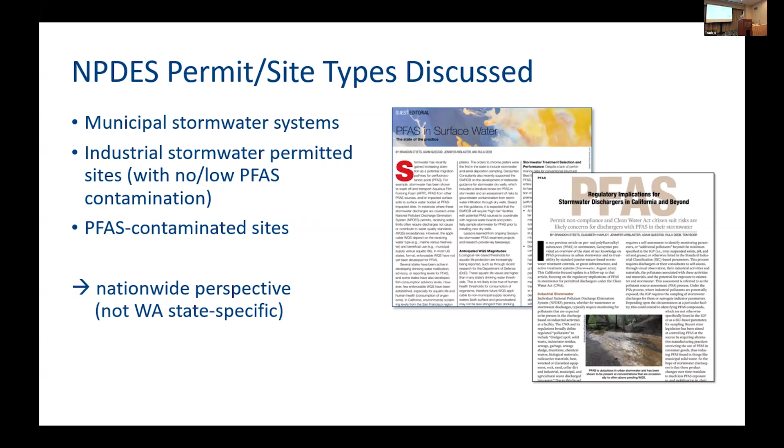Okay, so now going into the regulation of this contaminant first. I do a lot of litigation, so I apologize if I get kind of into the weeds on the regs, but I'll talk about stormwater permits for municipal, industrial, and then contaminated sites. This will be a nationwide perspective. It will not hone in on Washington State. So municipal stormwater systems, these are receivers, but they're still responsible for their outflow and quality. There's tons of litigation and enforcement bearing that out.

PFAS monitoring is not incorporated into MS4 permits around the country anywhere that I'm aware of, but regional monitoring programs are filling that gap. PFAS limits are not in MS4 permits, obviously, right? You don't use numeric limits in general in the MS4 permit writing context. You use a BMP-based standard, which is the maximum extent practicable and minimum control measures. Numeric limits are occasionally appearing in MS4 permits. They've been in California for 15 plus years, and that's where you have TMDLs. So that process could develop PFAS limits in MS4 permits, but the 303(d) listing TMDL development process is usually decades, so it would presumably follow a similar timeline.

The regulatory and litigation risks. Now, enforcement is rarely over receiving water limits. Right? The receiving water limits say discharges shall not cause or contribute to water quality standard exceedances in the receiving water. That's pervasive in all MS4 permits and all stormwater permits in general. That's usually not enforced against. It's very, very rare. The San Francisco case that went to the Supreme Court was one of those. But citizen suit litigations pop up all the time over that, grounded on noncompliance around that provision in the permit.

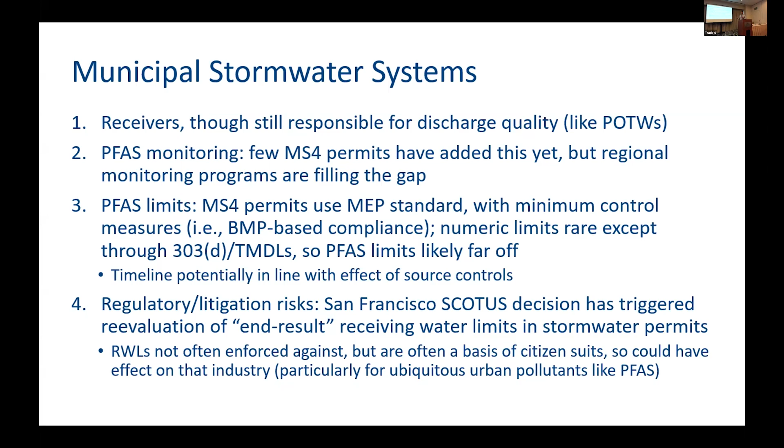So this decision from the Supreme Court is now altering that language in these permits to come out and look a different way, which has implications on the litigation risk.

So this will put in context, what are the levels that you see in urban runoff? For 6-PPDQ, you detected it in urban runoff, often above sensitive risk-based thresholds, so it matters to you. Well, for PFAS, understand that it's not a threat to aquatic life, it's a threat to human health through a drinking water pathway. And eventually, as criteria emerge, through a fish consumption pathway like dioxins, like PCBs and other bioaccumulative compounds. So it matters in urban stormwater.

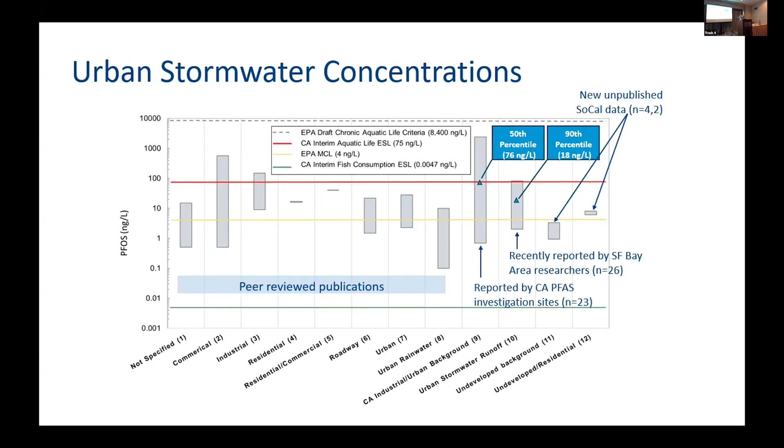The latest data sets that I think are most relevant in the Bay Area, SFEI is generating this. And I think that this is a robust statistic representing the abundance of data. We have some other data sets showing that where you lack urban development, concentrations are below drinking water standards. But as soon as you add a small amount of residential development, just exposed sources on paints and roofs and everything else, you jump above that threshold. So it's a human health problem.

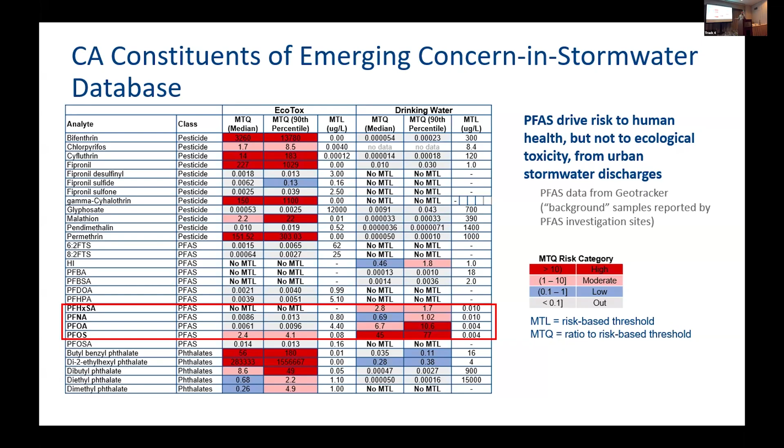I guess one way you might look at 6-PPDQ is it's adding to this toxic stew of things that are already threatening to aquatic life. Whereas, this is why when we write drywell standards, we were saying that generally it's safe to infiltrate to groundwater that's used for drinking water. Well, PFAS really changes the dynamic there.

Okay, continuing on the applicable regs in the municipal stormwater permit, you have green infrastructure. If you're going to design it for PFAS, it requires significant carbon amendment, significant contact time control. All that translates to cost. What is the ultimate solution? You get that asked all the time. It's got to be true source control. There's an abundance of legislation flying out amongst the states right now that will phase it out from consumer products as well as outdoor products. The outdoor products obviously matter a lot more to stormwater exposure.

There's a conceptual model being developed now by the San Francisco Estuary Institute, which is going to semi-quantitatively evaluate this and then run scenarios for what happens to stormwater concentrations when you phase these out, which should be really interesting.

And stormwater infiltration projects, I think that represents another risk of enforcement and maybe more importantly, some citizen suit risk, because PFAS has the perfect storm of attributes: it is toxic to human health. It is abundant at levels above toxicity thresholds. It is mobile through porous media, and it is persistent, right? I can't think of another pollutant in stormwater that has all 4 of those attributes definitively.

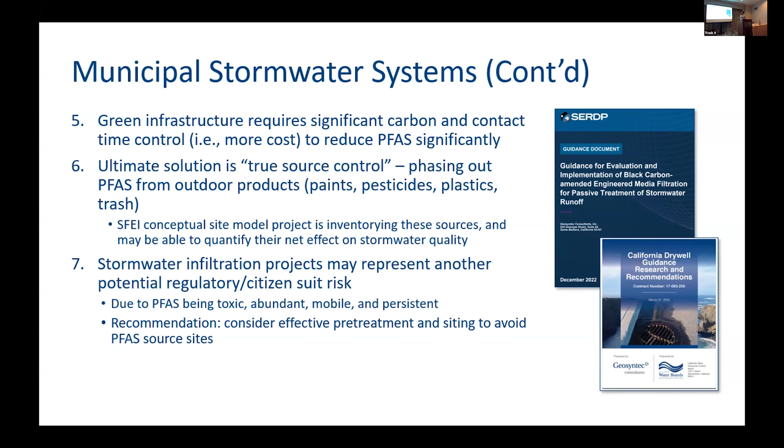And so the recommendation here is to really, if you're doing regional scale infiltration of urban stormwater, you might consider more robust pre-treatment in light of this, especially for dry wells where you're kind of pushing it under pressure closer to the water table.

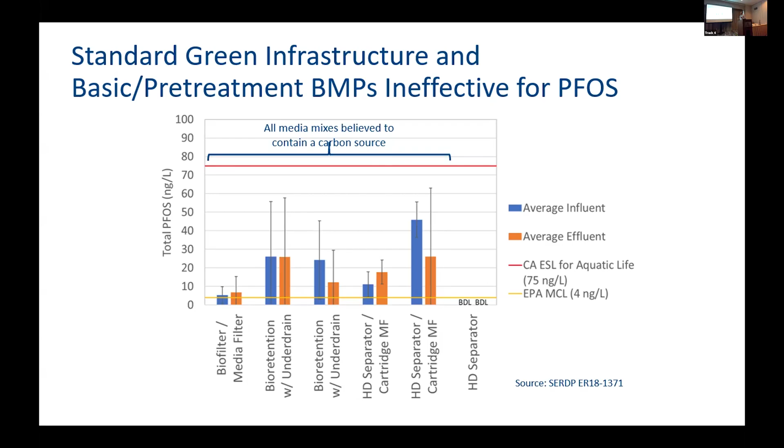And every one of these is a blend of some proprietary devices, some non-proprietary devices. I think all of them have media mixtures that have some component of GAC to them. I don't know that any have robust contact time controls, but in equals out. And that's what you expect for this chemical.

Let's talk about industrial permits. So industrial permits, stormwater at most of these sites is going to be kind of at or around that urban background level, that less than 100 nanogram per liter level. These permits, I would say Washington is a bit of an exception in this regard, but the federal regs and almost every other state build these to solely regulate industrial sources, which are specifically defined in the regs. And so industrial permittees are not, again, Washington has some deviation from this, but they're not in the other states broadly responsible for pollutants like MS4s are.

Now, okay, how's PFAS intersecting with these? What you're seeing is the first front end of ISGPs across the United States adding PFAS monitoring. It began with Colorado, Washington, and Minnesota as the first 3. It is applicable to specific industries. I think Washington might be one of the few that adds fuel terminals. The others focus on air transportation, waste management, a couple other industries.

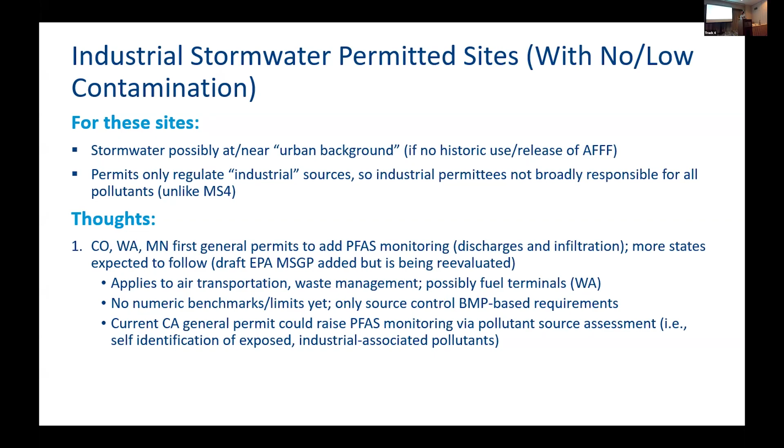There are no limits or benchmarks yet for it. This is also true of the EPA multi-sector general permit, the draft that came out under the last administration. And there are occasionally some source control BMP based requirements that are pretty doable. And then California has another element that's a pollutant source assessment that is discharger led that could add PFAS, arguably.

Continuing with PFAS and industrial permits, there's another class of industrial stormwater permits that are individual permits, right, for sites that are sufficiently complex. What you're seeing across the country is increasing use of PFAS limits in individual industrial stormwater permits for PFAS associated industries, like the ones that I just listed. And so these manufacturing sites, there's at least 3 that I'm listing here that we've worked with: refineries, airports, individual permits that have PFAS limits in them. So those are already in existence. There's more expected to follow that trend.

Those use a mix of water quality-based effluent limits that are based on water quality standards and technology-based effluent limits that are based on technological performance for removal of PFAS. And then there's dilution. I would say that dilution is a little less accessible for PFAS because the background concentrations are so close to standards. So you lack the assimilative capacity to support a dilution request. Citizen suit risks are really high there, at least as long as the receiving water limit provisions remain in there. And you may say, well, what if I don't sample? Other parties are known to sample.

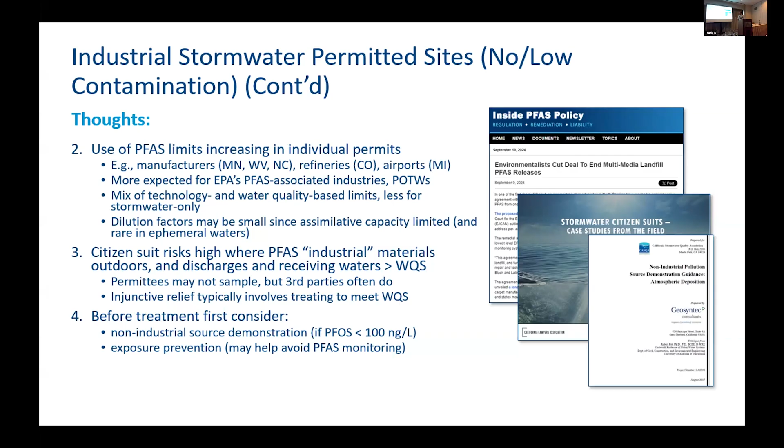And then before treatment, I often get asked, what are some low-hanging fruit that I can do if I'm this kind of site and I'm having to monitor for PFAS? I would say, in California and in almost every other state, the IGPs allow non-industrial source demonstration. So to the extent that your regulator may be open to that, that is certainly a possibility with the data sets that I cited in the earlier slide, showing what background levels are in urban stormwater, where there's non-industrial contributions. And then I would say exposure prevention is critical. If you lack any exposure of PFAS containing materials to rainwater or stormwater, then you have a very good case that all the PFAS that's measured is not industrial.

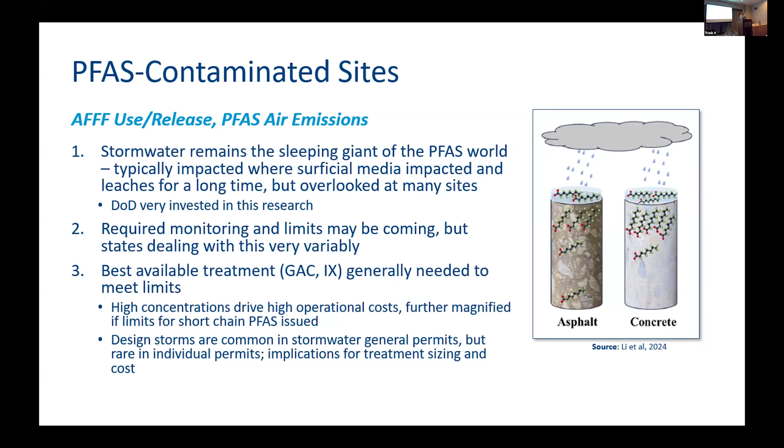I have a set of slides on remedial strategies for PFAS impacted sites. These are sites that formerly used and possibly released AFFF. I'm not going to go into detail here because I don't think that's the general interest of this group, but I could talk about it later. I will just say in general, the lessons learned from working on a number of these across the United States is that the stormwater migration pathway for PFAS at such sites, you might call them acutely contaminated, is fast, especially from the conceptual site model perspective of remediation engineers and scientists.

It moves much faster than, obviously, groundwater. And so there's less time to do things like lengthy characterization studies and remedial planning. You often need to hop on it. It's significant as a mass flux relative to other migration pathways because the concentrations tend to be high in stormwater, and the volume of water is very high.

It is long lasting, obviously, forever chemicals. And there's a number of studies. This is one by Queensland. They've done a ton. We're working with them on research for DOD. And this leaching, it doesn't wash out after a year or two. It continues for decades and decades.

It's sticky, so it may contaminate your downstream conveyances. So where you had asphalt that had an AFFF release, now what's contaminated is the catch basins and the pipework and everything downstream to the receiving water.

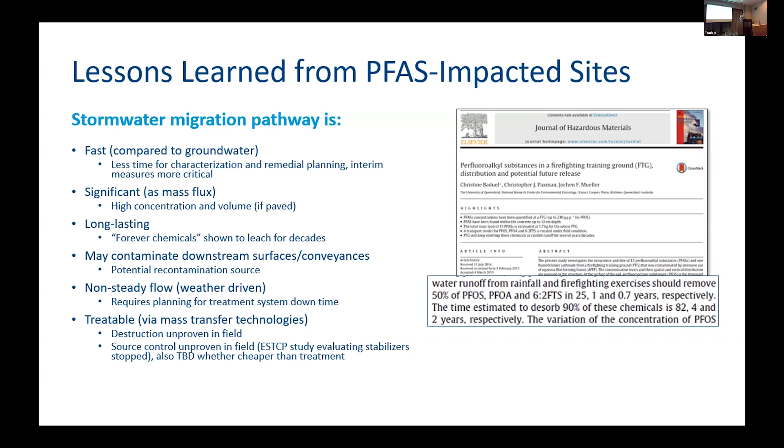When you're managing it through treatment systems, it's a non-steady flow. I think that kind of explodes the minds of some wastewater treatment engineers. They're used to working with a waste stream that is continuous and steady, where their membranes are kept wet. So that's something that requires some additional thinking, but it is treatable through mass transfer technologies. That means ion exchange and GAC. Destruction, though, is still unproven at a field scale.

So how am I doing on time? Oh, thank you. It helps to talk fast.

What I'll talk about now is that I see a lot of presentations on guidance for stormwater media filter designs and stormwater control measure designs. And here's another one. I'm sorry, there's so many out there and tools to support that. This one is specifically built for DOD through the SERDP research funding program using black carbon, which just means biochar and GAC, for targeting trace hydrophilic organic compounds in stormwater.

So they looked at a corrosion inhibitor, some current use pesticides, and 2 PFAS, PFOS and PFOA, that are very hydrophilic. So very dilute in dissolved form, very difficult to treat, like your dissolved metals and orthophosphate. So this is a technical guidance manual. You can find it if you use this QR code, or you can also just Google ER18-1145, which is the SERDP project number.

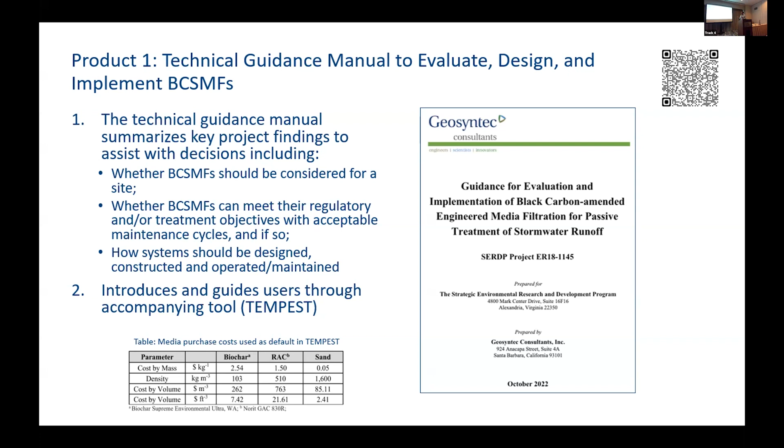I mean, imagine this big footprint biofilter or an unvegetated media filter, and you need to replace it, let's say, every year. That would be a pain in the butt, right? To dig that whole thing out. Whereas you can just exchange a GAC vessel pretty efficiently. It's built for that. The second part of this project was to produce this tool.

It is this flexible Excel interface, and in the back end, hidden from you, are the removal isotherms that were developed in Stanford's laboratory using their column test, looking at PFAS removal at different influent concentrations, at different dissolved organic carbon concentrations, and all the other variables that dictate removal and the longevity of that removal,

which is a real focus of the study and something that I've appreciated seeing in some of the other studies up here on media filters, where it's not just how much did it remove in the first year, but how long will that removal rate remain and when do you need to initiate major maintenance to resuscitate it.

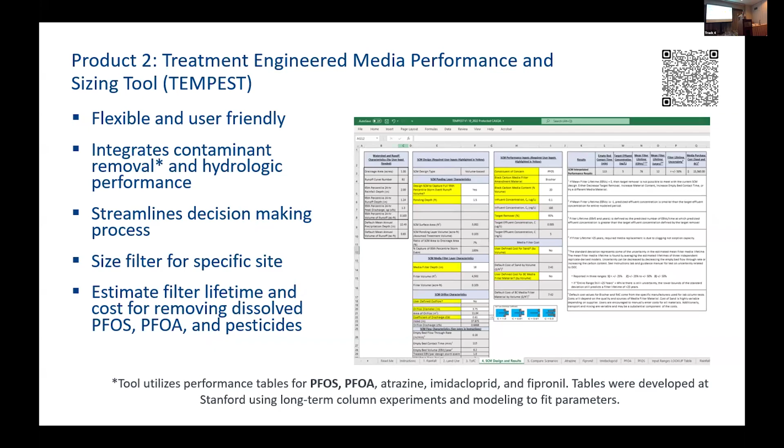So the next thing is, you plug in these various inputs and you get contaminant removal and media filter lifetime. So here's an example, a scenario where you say, well, I want to compare biochar, and here I'm using a regenerated activated carbon. Same hydrologic inputs, sizing criteria, you can have 85th percentile sizing or whatever you want. The same hydraulic retention time.

I've got an influent concentration that is about 100 nanograms per liter, and let's say I want to achieve 5 nanograms per liter in the effluent. So 95% removal, just keeping it simple. And what it tells you is that you want 20% media content by volume. In this case, the targeting time is pretty long.

By stormwater design standards, I try to keep it 45 minutes or less. I don't know if some people go longer than that. I think the footprint really grows if you're going longer than that. But this is a long one. It's PFAS. It's really hard to remove. It's barely hydrophobic. And PFOS is one of the most hydrophobic of the PFAS.

So I have the target effluent concentration, and then it computes the media filter lifetime. So you can see the regenerated activated carbon obviously lasts more than twice as long. That's a big plus, right? The chemical removal performance is going to run for a couple decades. And there's some quantification of the uncertainty of that lifetime. And then there's the cost associated with it from different suppliers' estimates that we've pulled together.

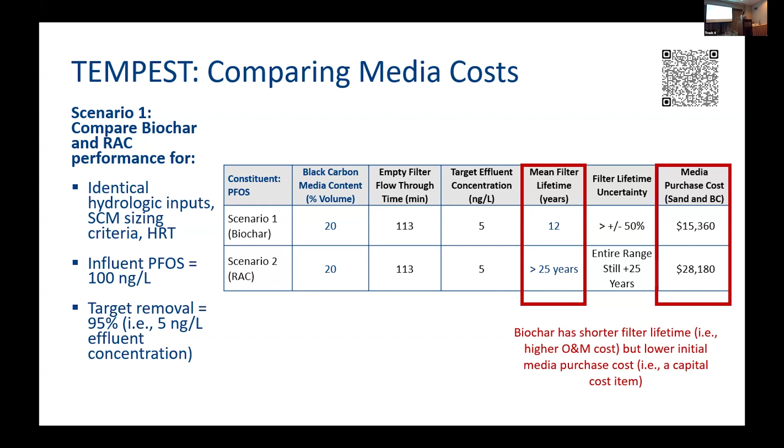So it allows you to say, am I willing to save $13,000 but have to replace it twice as frequently? That's nice cost-benefit calculus for a project builder or owner.

Here's another scenario where we said, what if we normalize the performance for GAC and biochar and regenerated carbon? What if we want both of them to achieve 40% removal? So I've now lowered my removal target, and I'm going to have a longer HRT, just the scenario that I ran. So I've got a retention time that's almost 3 hours. That's really long. I think that's beyond practical.

But what you see is, if I do biochar, which everybody knows is cheaper, that's why there's so much talk about biochar, I need to have 25% by volume in the media filter be biochar. That's now a bigger number. And with 5% by volume, I can get the equivalent removal using a regenerated activated carbon. And so now the cost just became equal.

So keep in mind that biochar isn't this magical amendment that you can add that is so much cheaper than carbon. Well, you may need less carbon to be equivalent to the amount of removal you could get from the biochar. This is all based on the microcosm studies in the lab at Stanford. So that's all I have on the tool, and I'm happy to open it up for questions now.

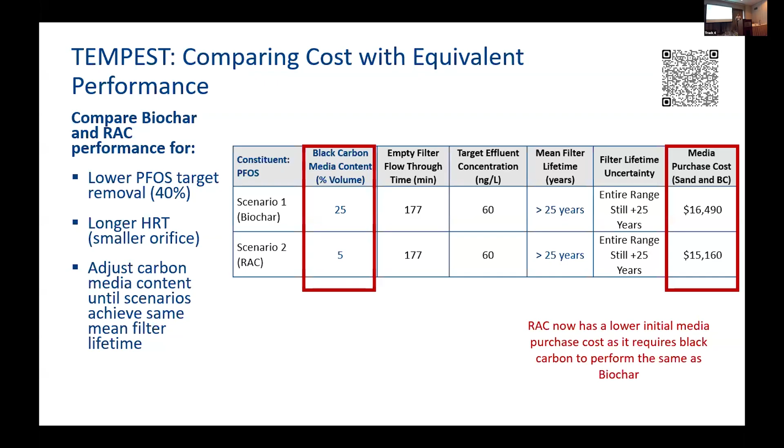PFAS is the first one where I have a site, I didn't show you the slides, but I have downspout filters at a PFAS manufacturing site. The influent concentrations are above 10,000, which is the same influent concentration that I showed in the GAC slide. And there, breakthrough was in the second storm. I have never seen a chemical like that in my career. Think about that. In the second storm, it was PFOA. That's crazy. It's not an effective remedial strategy, right? Yeah, and that's true when you have high influent loading and a chemical like this.

In California right now, all NPDES permits are basically on pause. All renewals are on pause because they have to consider the implications of the Supreme Court decision that invalidates the end result receiving water limits. And so they're trying to figure out how to do that.

And there's a lot of discussion amongst... I'm a chemical engineer. I serve as a testifying expert to attorneys. I'm not an attorney. But what we're seeing in the cases that we're working on is that there's a lot of industry groups trying to advocate for how they'd like to see the replacement occur. And we see the permit writers working with their counsels, how they are thinking.

And the initial things that I'm seeing in the first batch of released revised permits are that where there's an abundance of WQBELs, like in municipal wastewater permits, they're a little bit more comfortable just deleting the receiving water limit language. But in those that don't have that, which is all general stormwater permits, there's less comfort in losing that protection.